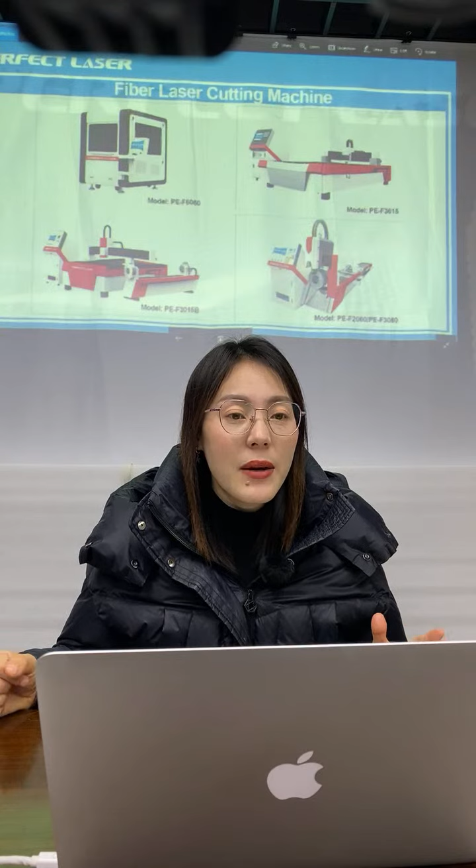Another model is PE-F3015. For this model, it has a bigger working area, 3,000 millimeters by 1,500 millimeters. If you want some other working area, you can also tell us, and we can offer you other models with different working areas. The PE-F3015 model is a very hot selling model in our company, and it's mainly used for cutting metal plate material.

So I would like to show some of the samples for you.

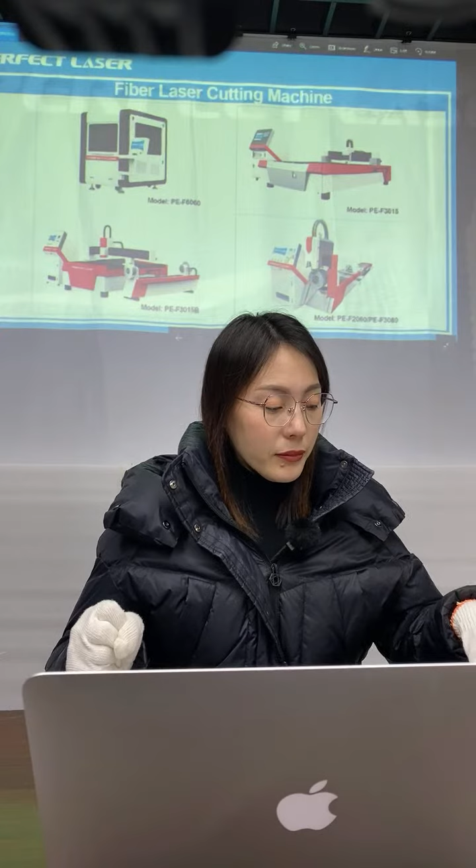You can see for those flat cutting samples. Hello Gabby, welcome. Hello Glenda, welcome to our live show.

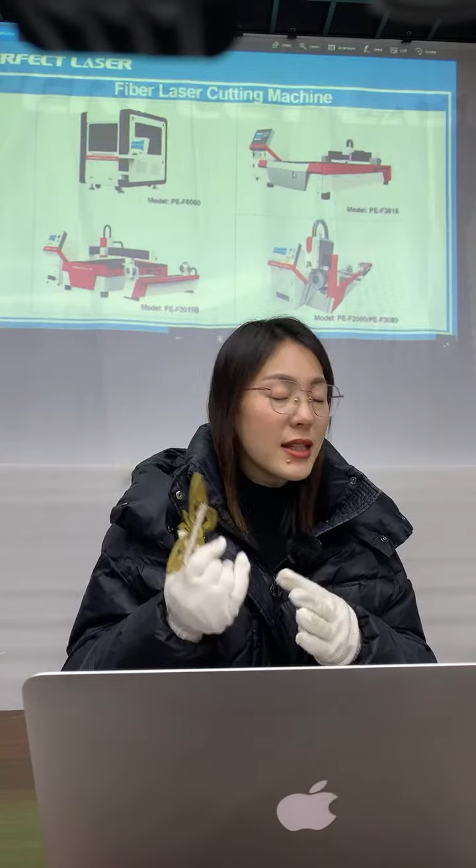Today we're introducing the fiber laser cutting machines. You can have a look, this is one of the samples. This is a copper material, the thickness is 3 millimeters. For the fiber laser cutting machine, it can work for all kinds of metal materials, such as copper, stainless steel, carbon steel, mild steel, galvanized sheet, and brass. All kinds of metal materials. This one is the copper material.

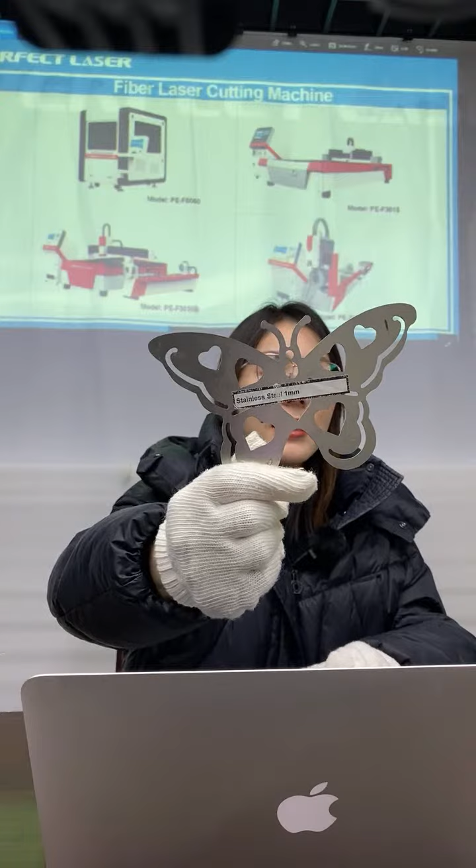You can also have a look, you can see all those cutting edges, and the cutting surface is very smooth. This is one of the samples, and I would like to show some other samples for you. This one is also a butterfly design, and you can see this is a stainless steel material, 1 millimeter thickness.

Hi Wu, welcome to our live show. You can see this, the thickness is 1 millimeter.

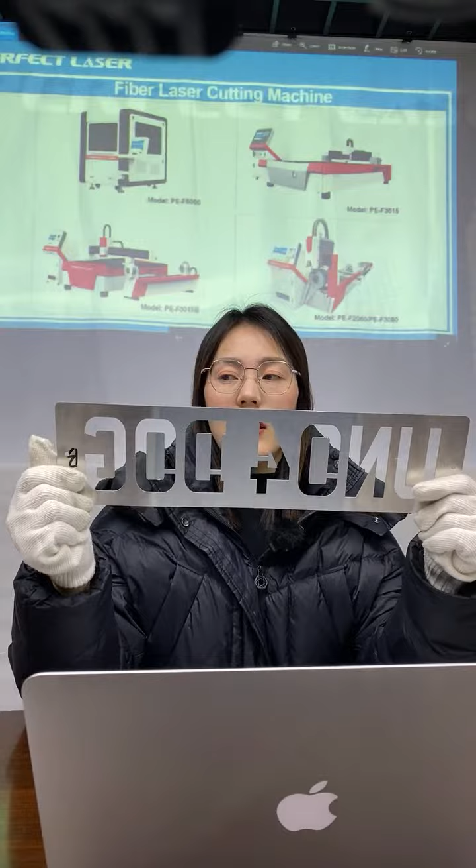Okay, so for some other materials, such as this one, this is aluminum material, so it's very soft. You can see the cutting, for the letters, numbers, and even logos. So this is aluminum material, and all the cutting surface is very neat and very comfortable.

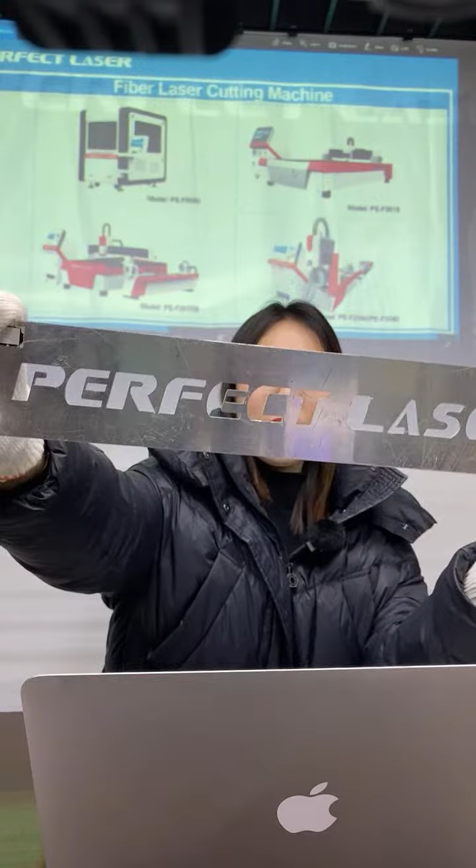And also this is another aluminum material, but this one is 2 millimeters thickness. You can see this one. This is the aluminum, 2 millimeters. And also for this one, you can have a look about the cutting surface.

And the small one, yeah. I know for this one, there's some metal spare parts, some accessories, even for some small parts cutting.

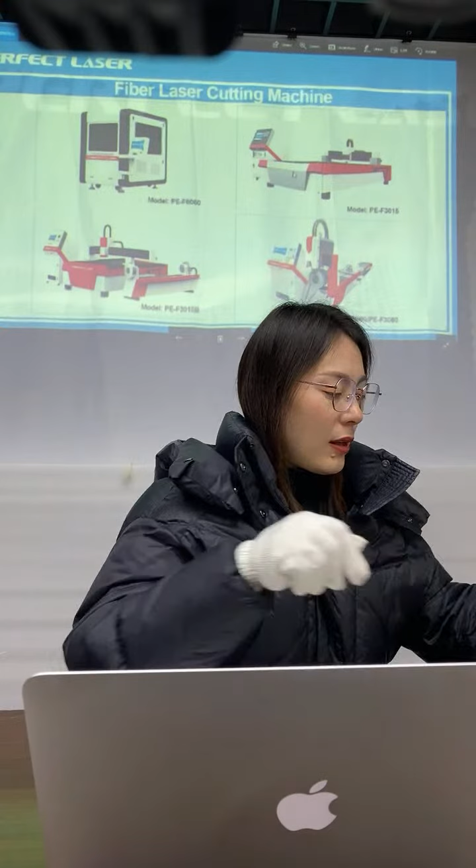This one is also a stainless steel material. You can see the design. Stainless steel.

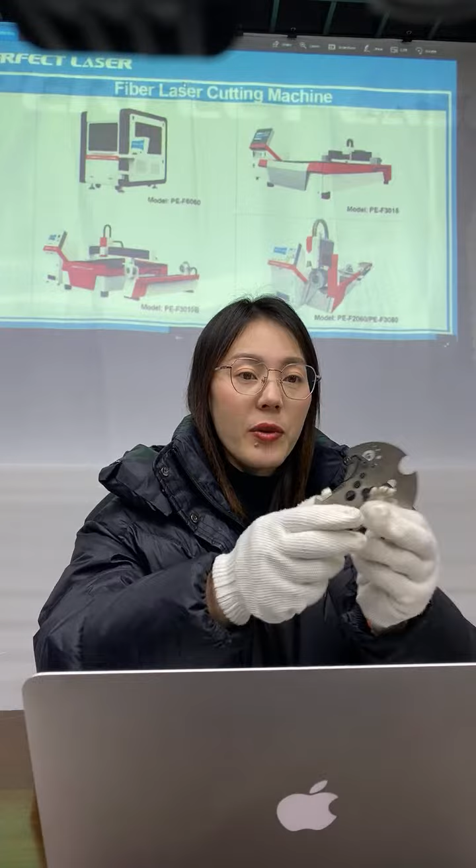And also this one, you can see, it's really a very precise cutting for very small parts. You can see there are many small curves, right? So many small curves there.

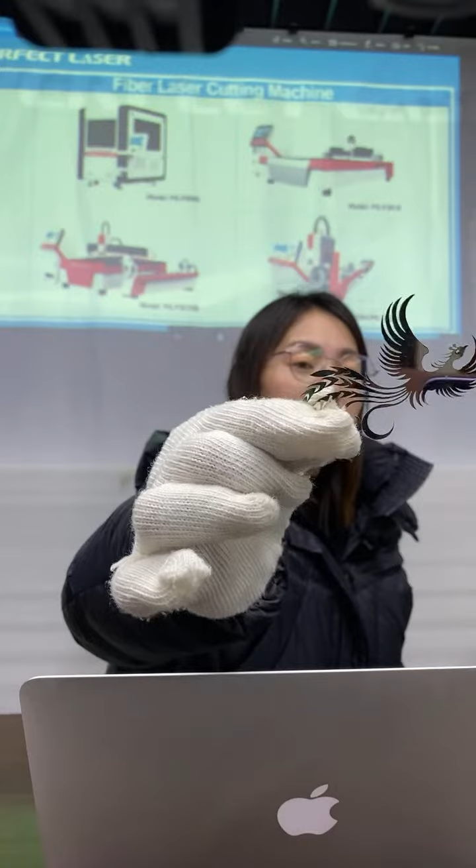And this one, well, this is really a very, very precise cutting. I like this one very, very much. You can see, especially for the mouth and eyes and all the feathers, it's really very precise, right? You can see even for those very small parts cutting, the fiber laser cutting machine will have a very good cutting effect.

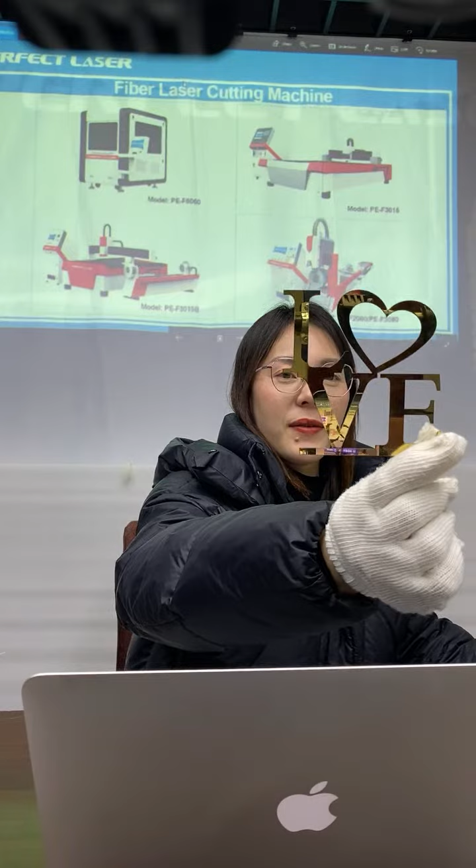Yeah, this one. This is also stainless steel. Well, love, this is a love. Very beautiful design, right?

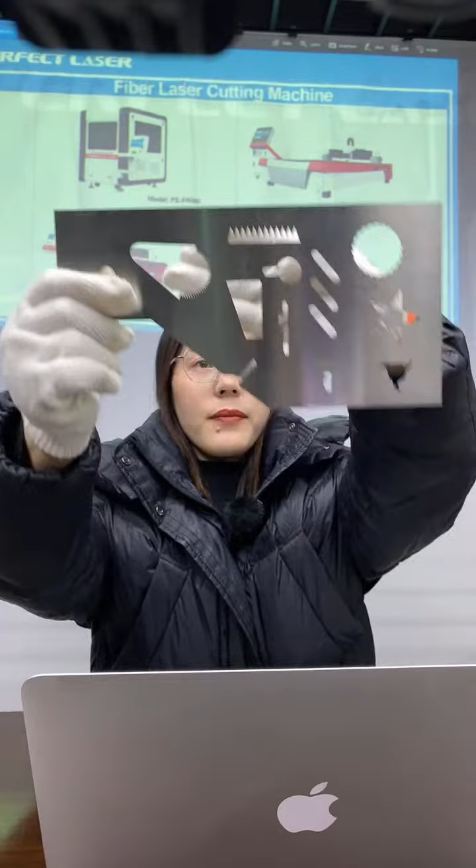And then for those one, yes, this is one time with different cutting design, cutting shapes. Yes, this one.

And also for this thick one. This is a big thumb up, just like a like button.

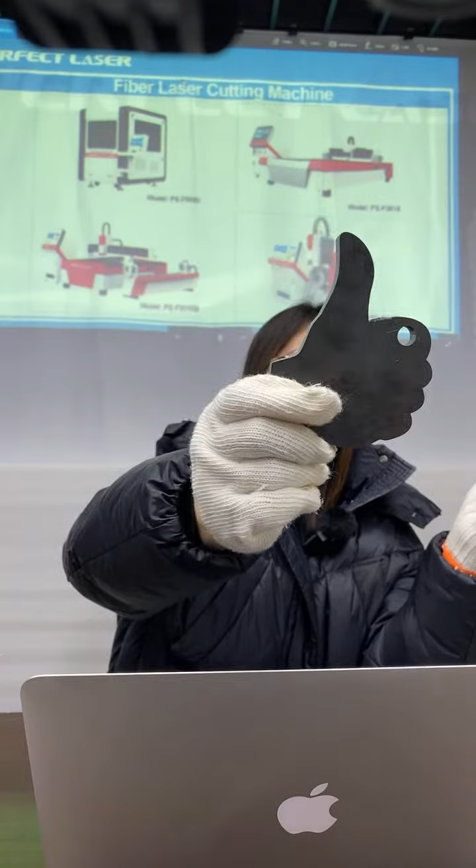Carbon steel, and also this one is also the carbon steel. You can see this carbon steel is 15 millimeters. You can see the cutting thickness, this is 15 millimeters thickness. This is carbon steel.

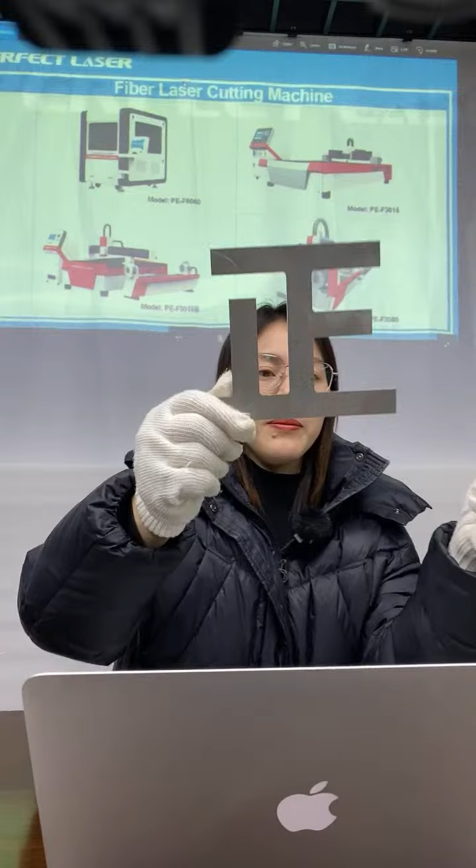And this one, aluminum, 3 millimeters. Wow, this is a Chinese word.

Also another one. Oh, this one is very heavy. So this is also carbon steel, 12 millimeters. This carbon steel is 12 millimeters thickness.

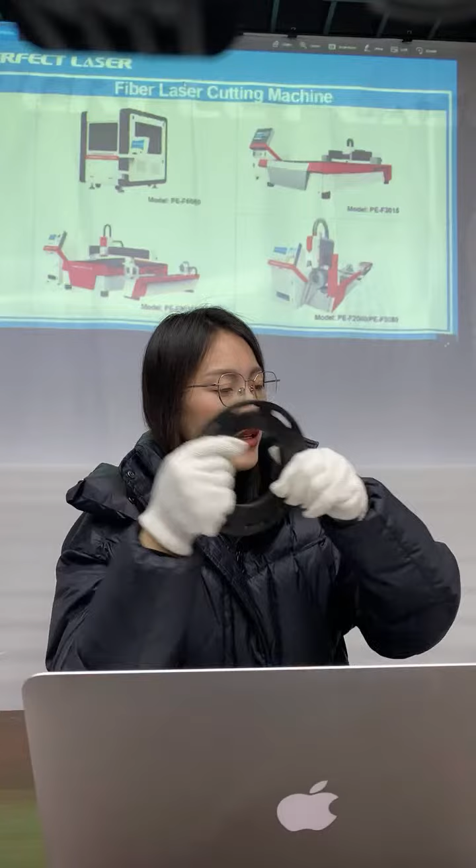Okay, so just now you see all these are the flat marking, or flat cutting. And also this kind of beautiful flowers.

We can make it after folding. We can make it like this one, just like a rose.

Okay, so this is for the flat cutting, especially for PE-F3015. This is the flat cutting.

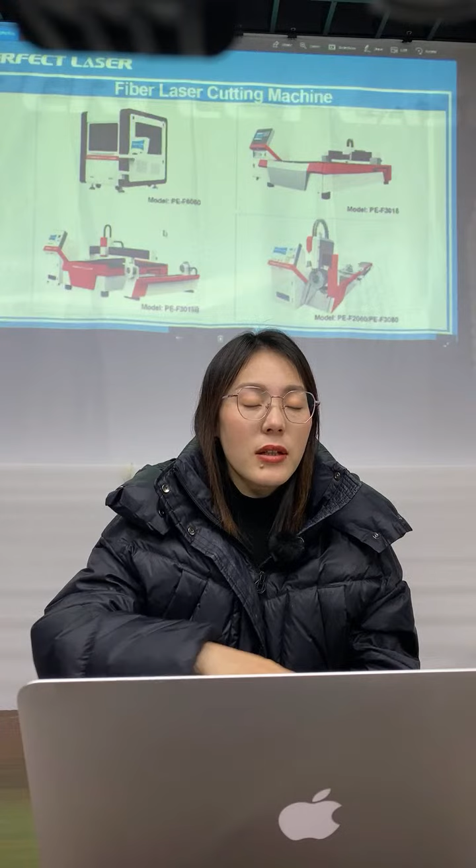Okay, so another model, PEF 3015B. So for this model, compared with the PEF 3015, it can not only realize the flat cutting, but also the round, rotary cutting.

Okay, so I would like to show you some round cylinder cuttings, just like this one. You can see this is a round, so this is a rotary tube, pipe, metal pipe.

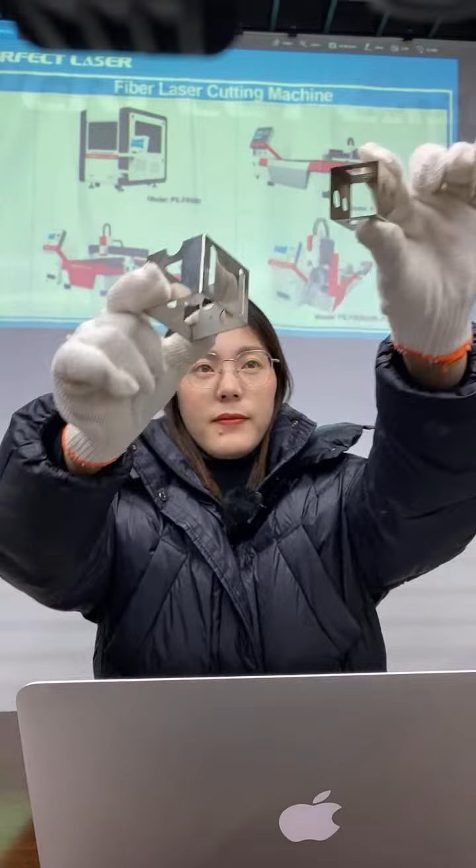And also for the square one, this is also the square pipe, with different diameters. Yeah, different diameters, and also the round. Wow, you can see this one, this is really a very big diameter cutting tube.

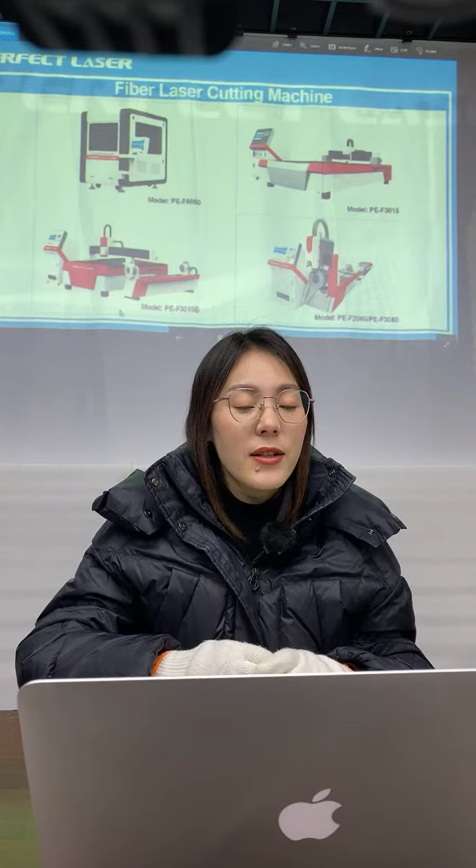Okay, so for PF 3015B, it can not only support the flat cutting, but also for those round rotary or the square tubes cutting.

Okay, so for the last model, PEF 2060 or PF 3080. So 2060 and 3080, they have different working areas.

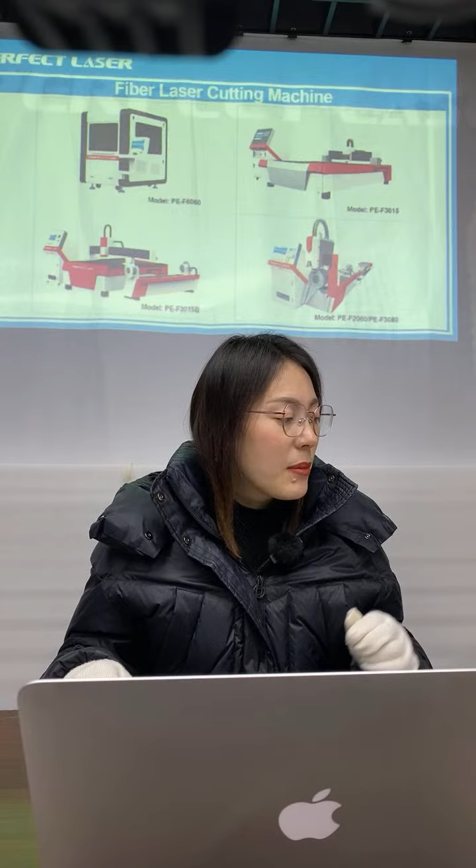Okay, so for the PEF 2060 or 3080 model, it's mainly only used for cutting those tubes or pipes, those rotary or the square pipes, and also those square pipe or tubes.

For those four models: the PEF 6060 has a smaller working area and is only for flat metal cutting. The PE 3015 has a relatively bigger working area, and it's also used for cutting flat plate.

The PEF 3015B can not only support flat cutting but also round or square tubes and pipes cutting. Another model, the PEF 2060, is mainly used for round or rotary cutting.

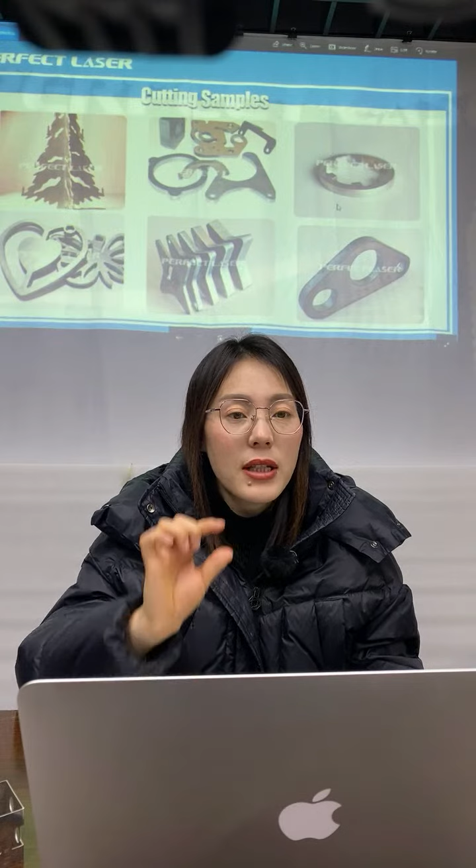So this is the general introduction about those four models. You can also have a look at this photo, where you can see many different cutting samples with different thickness, different materials, and different designs and shapes.

Since the fiber laser cutting machine can cut all kinds of metal materials, it's widely used in different fields and industries, such as hardware, lamps, cars, mechanics, kitchen utensils, and bodybuilding equipment. Many industries related to metals can use the fiber laser cutting machine.

Okay, right now let's start discussing this model. This is the PEF 6060 model.

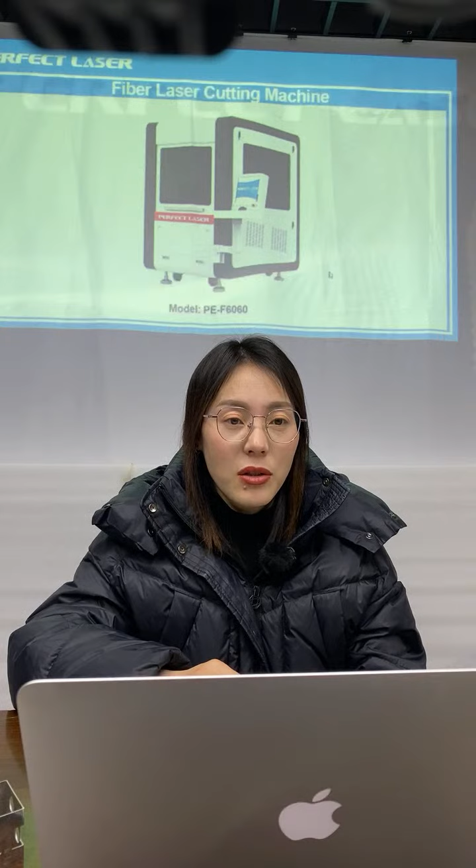This is the main structure. You can see inside of the machine it has the cutting head, and this is a separate PC system. Also inside the machine it has the working platform, with a double rack driver on two sides of the working platform.

Now everybody please enjoy the working video of this model, so you can have a look at how this machine works.

This is the PC control system. We will install the software into this PC, and then we can operate with the mouse and keyboard. Everything is ready, we can use it very conveniently, and it's very easy to operate, control, and adjust the parameters based on this software.

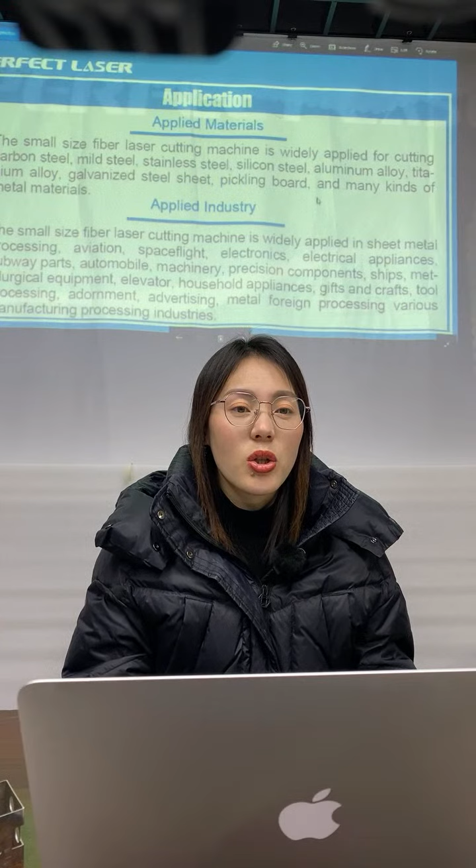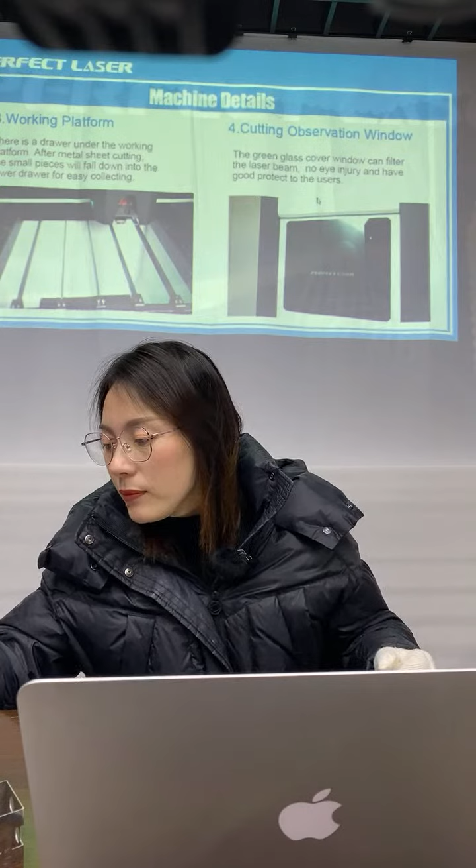millimeters. Okay, so number 4, this is the cutting observation window. Since this model is fully enclosed with a cover, we can see through the observation window to detect the working process of the machine. So with this observation window, there is no injury to the eyes, and it will be very environmentally friendly.

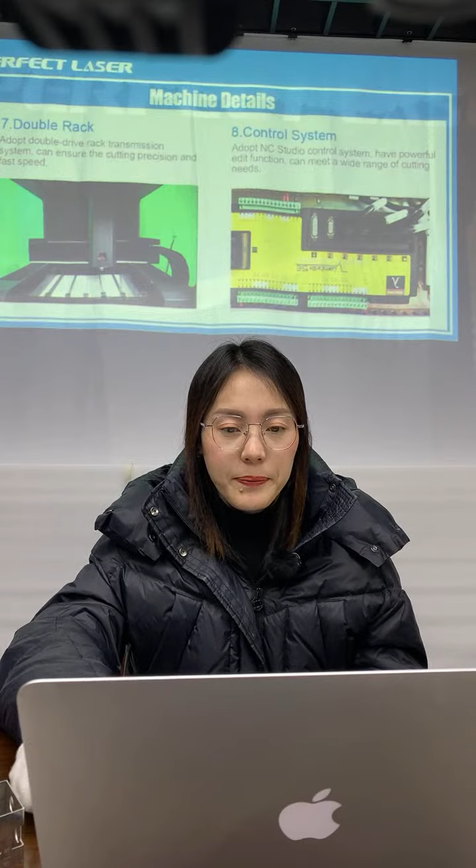Number 9, this is a collector, just like a drawer, so we can pull it out and pull it in. This collector will collect the wasted pieces after cutting, metal pieces after cutting will be collected into this collector, and then we can take it out easily.

Number 10, this is the water chiller, a water cooling machine. It's used for cooling and releasing heat during the machine's working process, so that it keeps the machine working in a very stable condition and status, and it also detects the working temperature automatically.

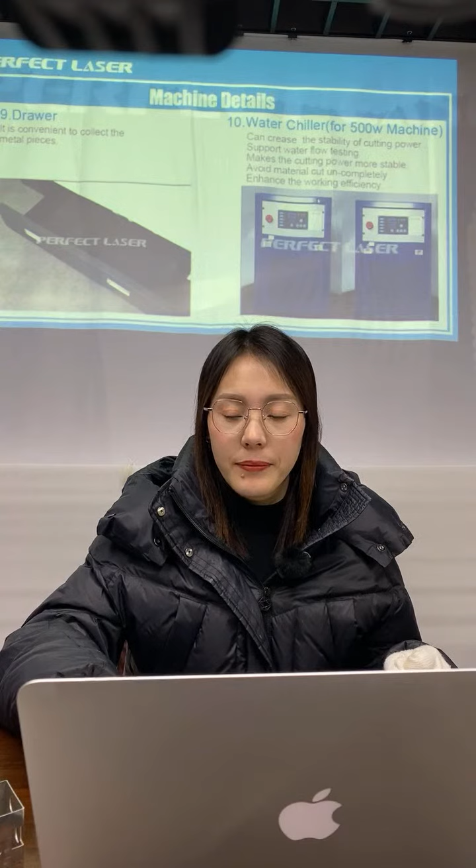Yeah, this is the water chiller. So, this is the introduction about the first model. The first model is an environmentally friendly model, right? It's enclosed, a fully enclosed machine.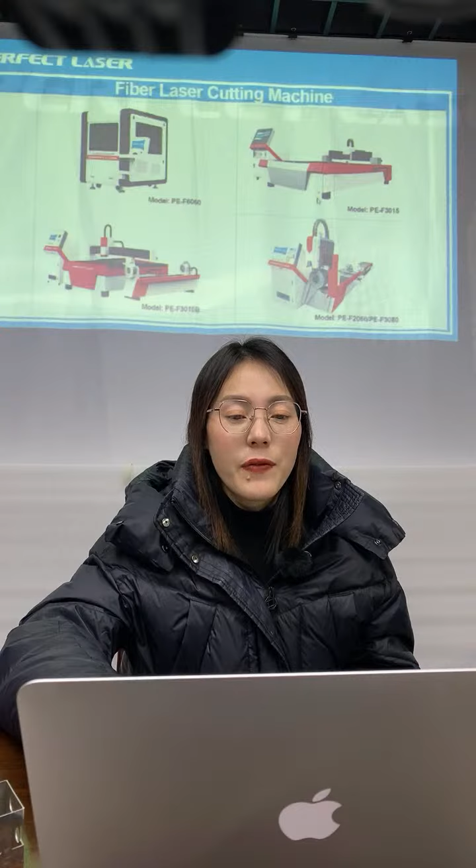Next, I would like to introduce the second model in detail for you. The second model is PE-F3015. This model is a very hot selling model in our company, and it's mainly for flat plate cutting. From the outlook and structure, we can see it's mainly composed of 2 parts: one is the control cabinet, the control system, and the other is the machine body with the working platform and the cutting head. You can see the main structure: the control cabinet, the laser optical bridge, the material feeding wheel, and the laser cutting head.

Now please enjoy this working video, please. You can see the structure and also the working of this machine.

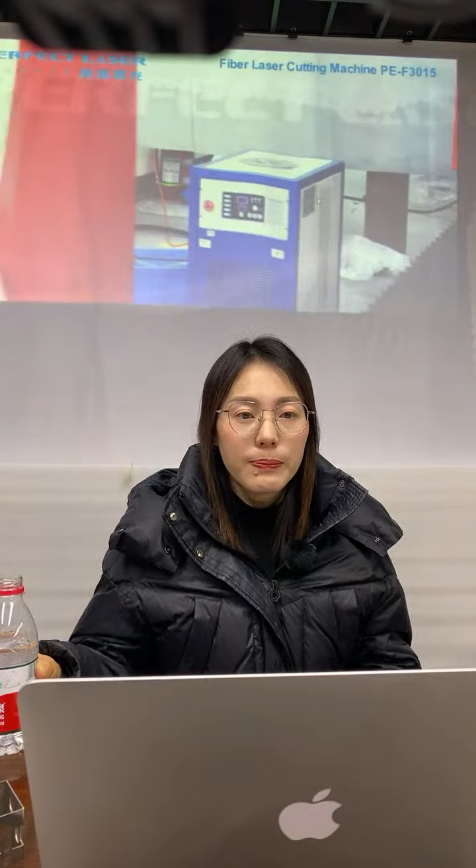Hello, Gabriel. Welcome.

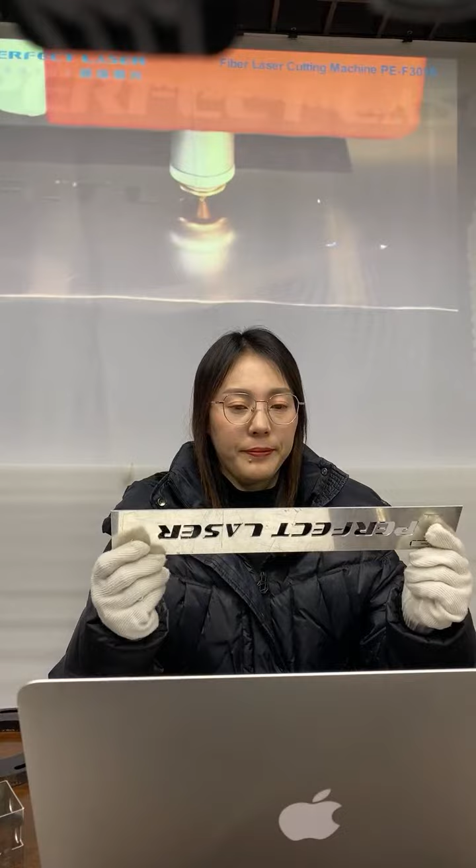Okay, it's this one. Exactly, this one in my hand. Yeah, so we can see the cutting process. Well, it's gonna finish, exactly the same with the one in my hand, right?

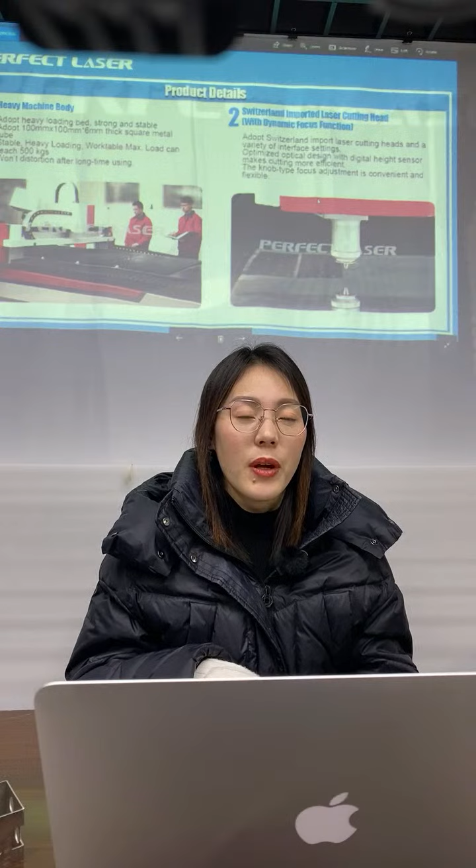Now we can have a look at the details of this model. Number one, you can see this is the working platform. So this one, the working area will be 3,000 millimeters by 1,500 millimeters. For this model, this is the working area.

And for this machine, the machine bed has a very heavy loading, and it's very strong and stable, since we adopt the 100 millimeters by 100 millimeters by 6 millimeters thick square metal tube, and also by once molding. So it will be very stable, strong, and heavy, with a very big loading capacity, and it will not get distorted even with long time use.

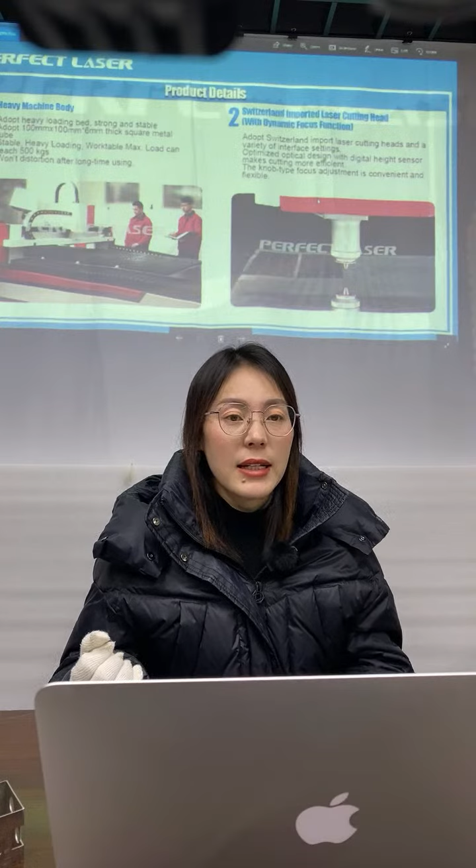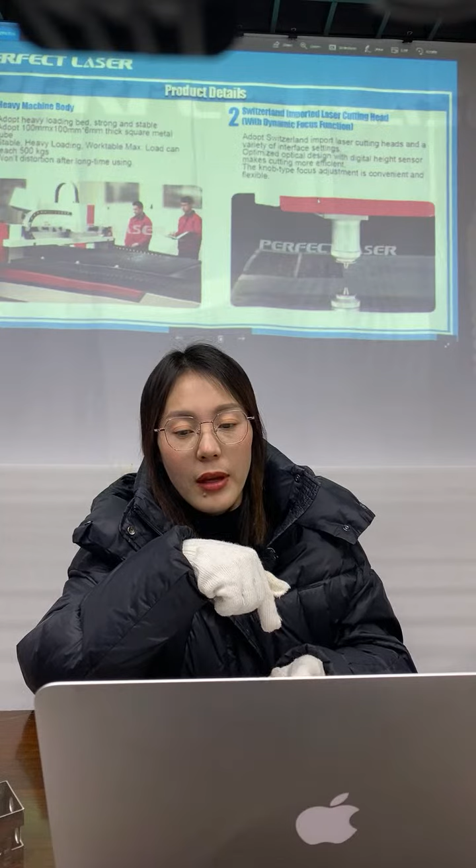Number two, this is the cutting head. It has a dynamic and automatic focusing and tracking function. So even when the whole plate is not that flat, for uneven plates, the cutting head will automatically adjust the distance. It will automatically track the surface of the cutting object, and also automatically adjust the distance between the cutting head and the cutting surface. So this is the automatic and dynamic focusing and tracking function of this laser cutting head.

Number three, this is the laser source. All of our fiber laser cutting machines use well-known brand laser sources such as Raycus and IPG Max, to make sure the machine works with very good quality, with a very fast cutting speed and high accuracy of cutting, and also to make sure the machine works for a long time with a long lifespan.

So number four, this is also the sawtooth type working table. It's very stable and has a very heavy holding ability.

Okay, so number five, this is the servo motor -- Japan imported Panasonic servo motor. So it will increase the cutting speed and the stability, and make sure the high accuracy of the cutting.

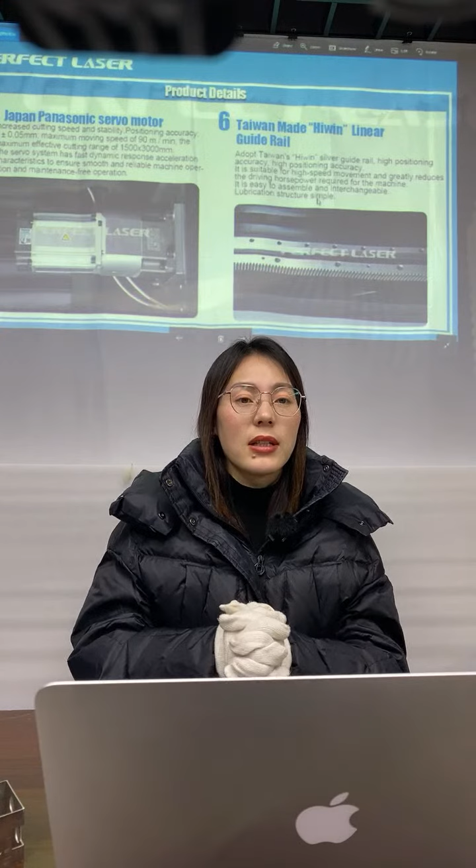So number six is the linear guide rail. This is a Taiwan-made Hiwin linear guide rail, so it will make sure the cutting head moves on the linear guide rail smoothly, and make sure the cutting result will be very accurate with high precision.

So number seven, this is a material feeding ball design. Since it's round, a ball, when the material comes through the wheel, this roller will make it much easier to fit the material onto the machine, to the working table. And it will not scratch the plate or the material. This is a very reasonable design.

Number 8, this is a separate controlling cabinet, with the industrial PC system in it, and also the mouse, keyboard, everything is ready there. So we will install the cutting software into the machine, and then we can operate on this control cabinet directly.

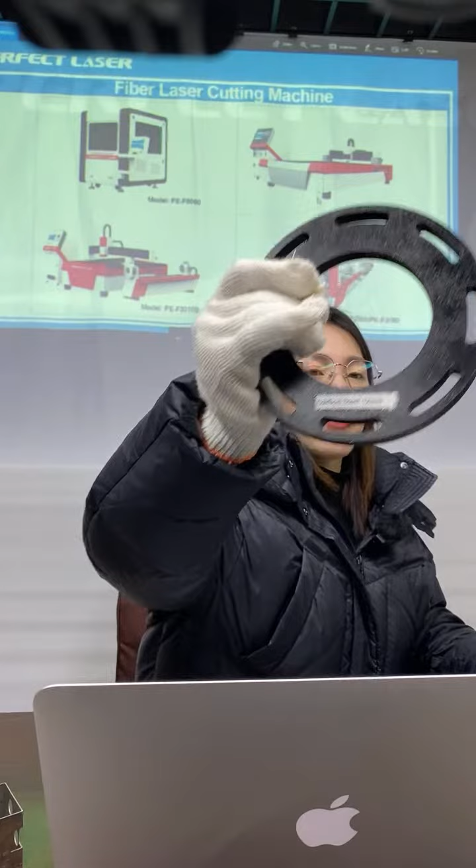So till now I've already introduced the PEF 6060 model and another model, PEF 3015 model for you. You can see these two models are mainly for flat plate cutting, such as flats with different thickness. This one is the carbon steel, and also this is very thick, 12 millimeters carbon steel thickness cutting.

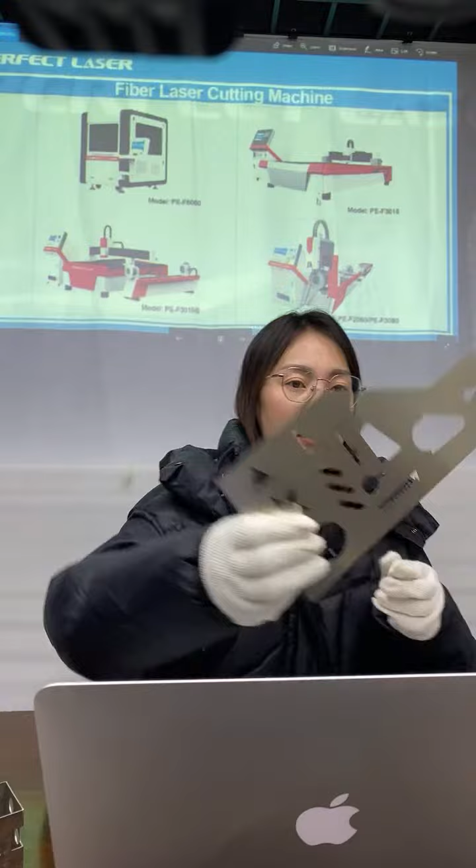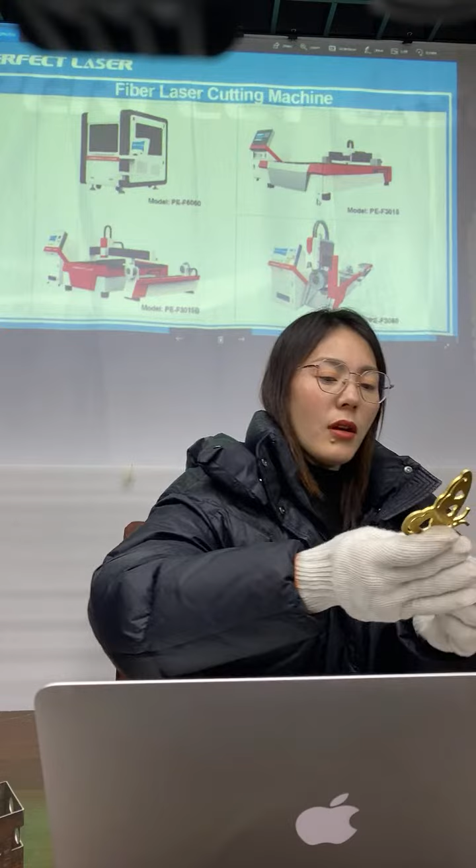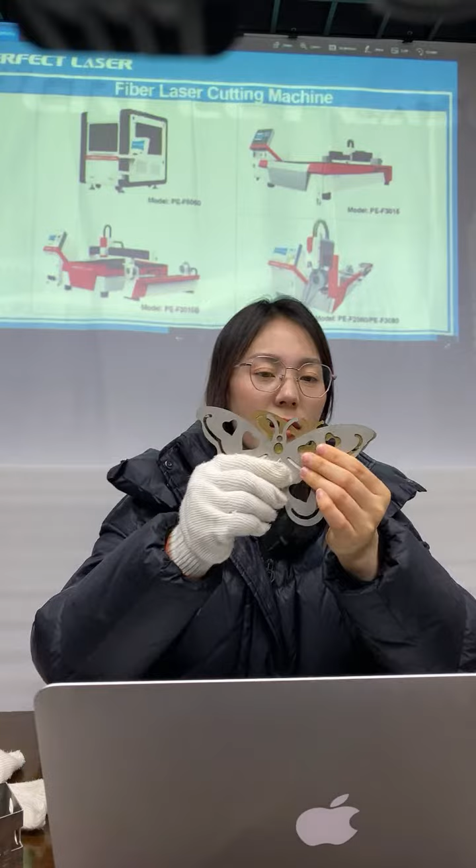And the stainless steel 1 millimeter, copper 3 millimeters. So you can have a comparison. These two, both of them are butterfly design, so we can compare the thickness - you can see the thickness is different.

Thickness is different.

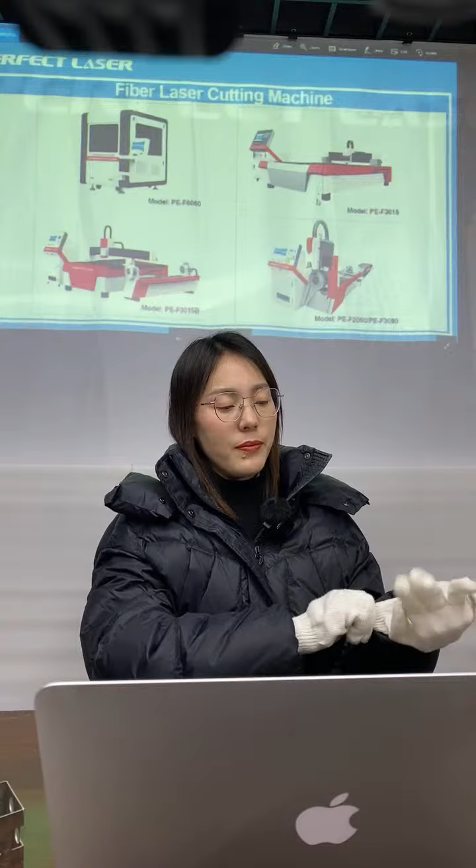So another one, a very small part design, small part cutting. Well, this one - I like the eyes very much, and also the feathers, because it's very small. Very small, but the fiber laser cutting machine can still have very high precise cutting for it. Also this one, we can look at the very small curves there.

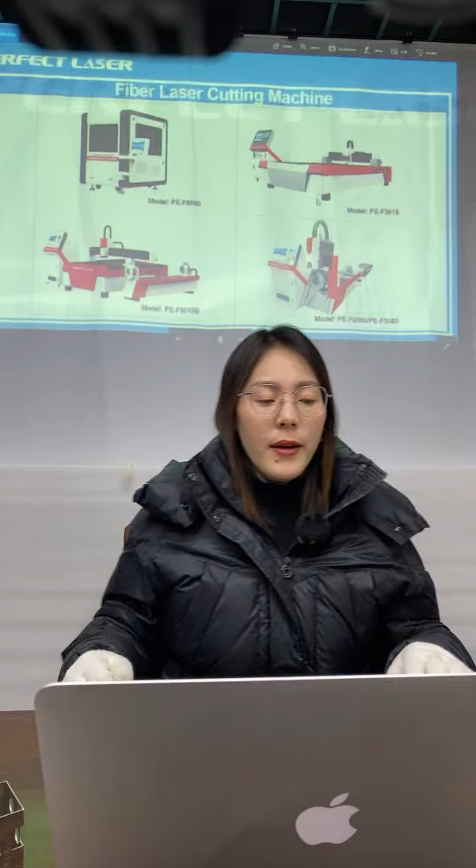Okay, so all of those are the flat cutting, flat plate cutting, for all kinds of metal materials.

So now next I will introduce another model, PEF 3015B. This model can not only cut flat plate, but also round, square tubes or pipes cutting, with this rotary fixture.

So we can see this is the outlook and structure of this machine. You can have a look at the main structure, the control system, the cutting head, DSP controller with the PEF 3015, and another one, the rotary cutting system. I would like to show you the working video, please enjoy it.

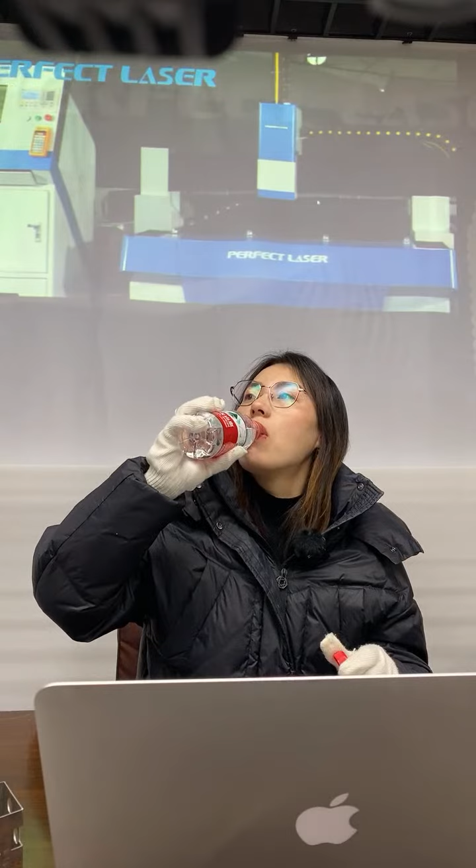This is the rotary fixture there.

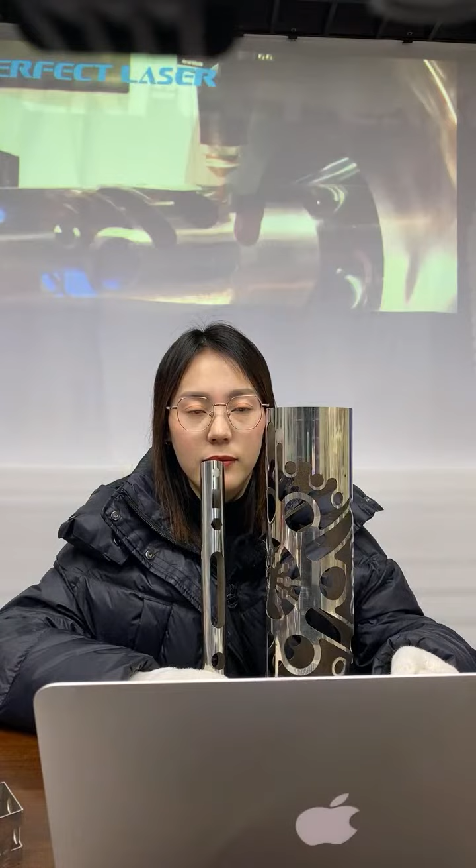Yeah, exactly the same with the one in my hand, right? The same one, and also the tubes, the small tubes.

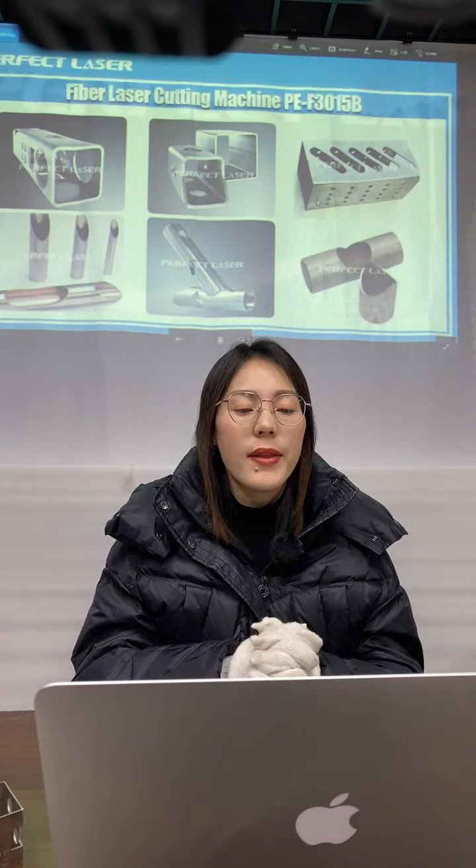So you can see from the video, not only for the flat cutting but also for round or square tubes cutting. This is the working video of this model, you can see the different cutting samples here - different shapes, the square one, square pipe, rotary pipe, with different designs.

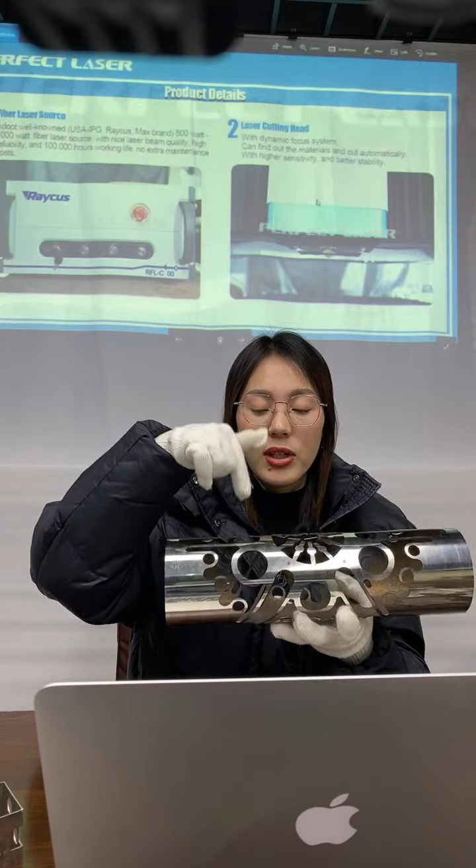And another one is the laser cutting head. The laser cutting head, especially for those round cutting, because it's not a flat surface, so with the dynamic focusing function, the laser cutting head will automatically track the surface of each part and automatically adjust the distance between the surface and the cutting head. This is the dynamic focusing system of this machine.

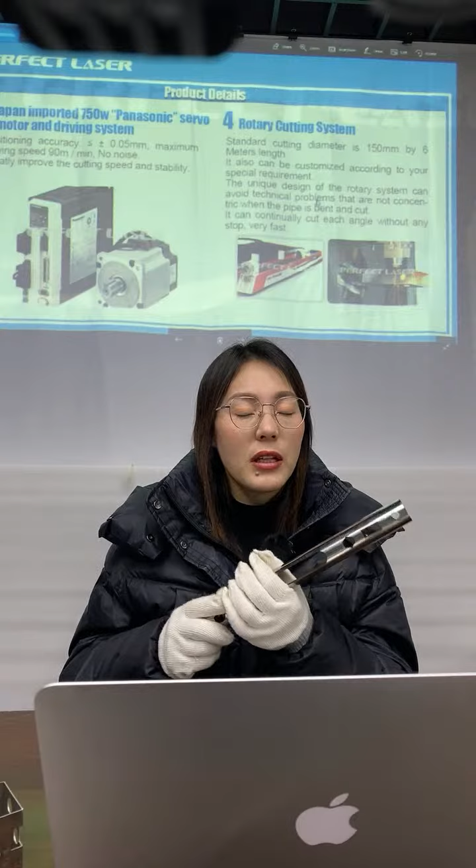Panasonic servo motor, so it has very high positioning accuracy and also very high cutting speed. Another part is the rotary fixture, the rotary cutting system. So for round or square pipes, it will fix the pipe tightly and then feed the material to the cutting head for cutting.

This is the LCD controller. So for this machine, it also has two ways to control the machine. One is through the control cabinet, which can operate with a mouse, a keyboard, and the LCD screen. We install the software into the machine so we can operate it easily.

For this model, we also have the DSP remote controller, so we can use this remote controller and stand beside the machine, in front or back side, to detect the working area exactly, and then set up through this remote controller. So it's very easy and convenient for the engineer to operate in any direction.

The same auto feeding ball design system. Since it's round, it's like a roller, like a ball, so it will be very easy for feeding the materials to the working table, and it will not scratch the material or the plate.

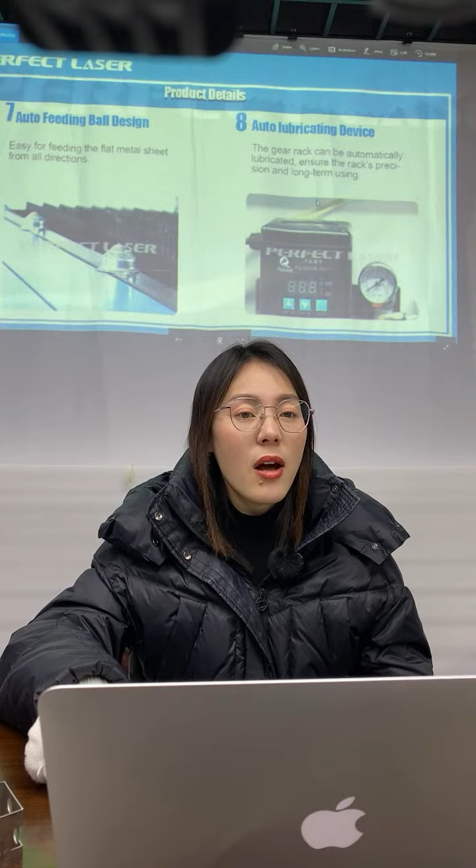Number 8, auto lubricating device. The gear rack can be automatically lubricated, ensuring the rack's precision and long-term use.

Number 9, this is the water chiller, also the water cooling machine. It will cool the machine during the working process and release the heat, and we can see the temperature through this display. It makes sure the machine works in a comfortable, certain temperature to keep it in the right state, and also ensures very high, accurate, efficient cutting.

So why choose a fiber laser cutting machine? Let me introduce the advantages of this machine. Number 1 is the high quality. The fiber laser has a smaller focus diameter and high work efficiency, high accuracy, high cutting speed, and also very good cutting quality.

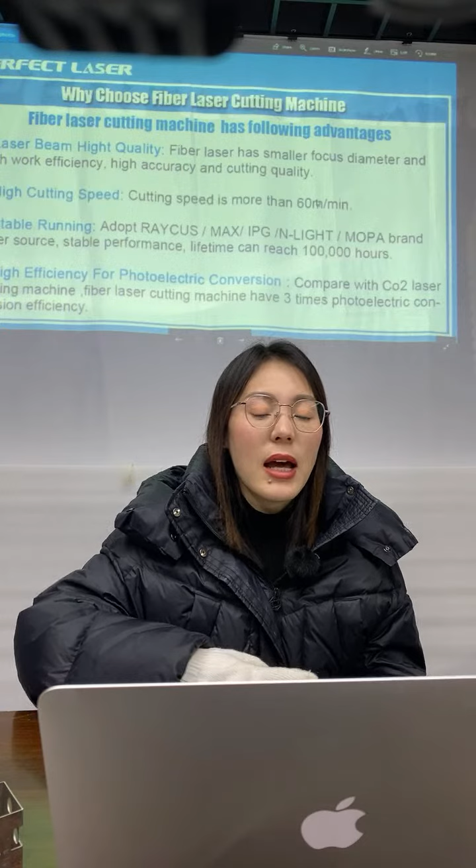Number 3, stable running. We adopt Raycus, IPG, Max, or other well-known brand laser sources to ensure stable performance, and the lifetime can reach 100,000 hours.

The next one is low cost. It's a very energy-saving machine and also environmentally friendly.

Number 6, free of maintenance. With fiber optical transmission, there's no need for reflect lenses or optical adjustment, so it saves maintenance cost a lot. Number 7, easy operation. With fiber cable transmission, there's no adjustment of optical path needed, so it's very easy to operate.

Super flexible optical effects. It has a very compact design, complying with flexible production requirements. So this is the third machine.

My dear friend, I have already introduced 3 models for you. So which one are you interested in, or are you in need of those fiber laser cutting machines? If you are interested in this kind of cutting machine, and also if you have any questions, you can let me know anytime and discuss with me.

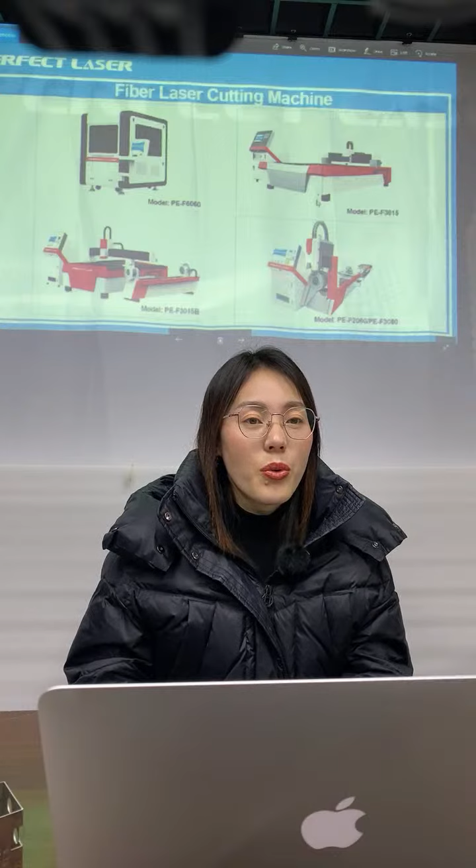Right now I have already finished those three models: PEF 6060, PEF 3015, and PEF 3015B. So at last is the PEF 2060 or PEF 3080. For 2060, the working area will be 2000 by 600 millimeters, while at 3080 it will be 3000 by 800 millimeters.

Now this is the outlook of this machine. You can have a look. Also the control cabinet, and another part is the machine body.

So this machine is mainly used for rotary, for round or square pipe types. For this one, you can see this one, a relatively smaller diameter square pipe.

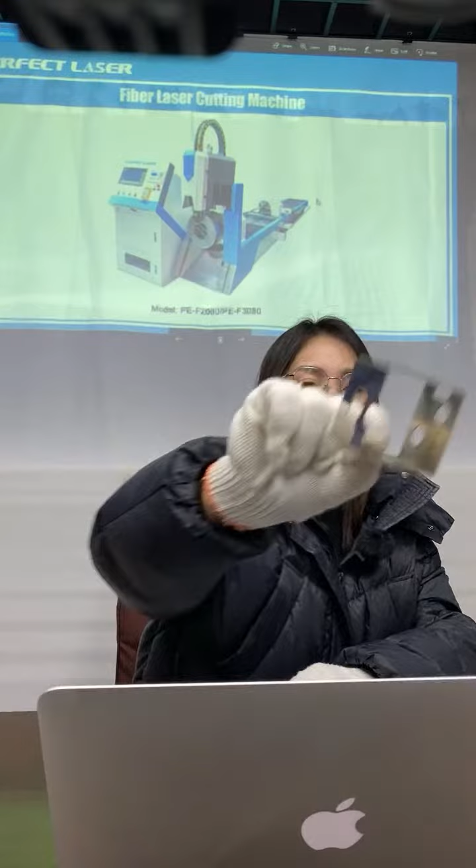I also have another one, this is a big diameter. You can have a look at this big diameter. Yeah, this is small, it's big.

Small and big diameters. And also for the round pipe, you can see this is a relatively smaller pipe, round pipe. Yeah, and I also have a very big one. Oh, that's not very big.

So very big diameters too.

Hi, hello. Hamaro. It's really very hard to read.

So this is the main machine, main structure. You can have a look. First one is the operation panel, the control cabinet, and the machine body with the rotary fixture, the head, laser cutting head, and the rotary fixture.

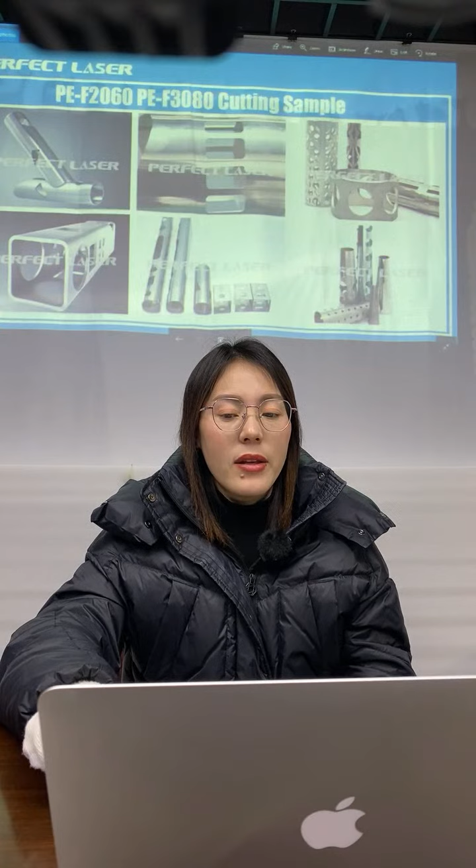There are some cutting samples by this machine. You can see all the square pipe with different diameters. Also round pipe, and also different thickness.

So my dear friend, let me show you the working video of this machine. Please enjoy it.

Then this round tube, yeah, this one in my hand.

Yeah, this is the remote controller. As you can start, pause, or adjust the cutting area. Round, square.

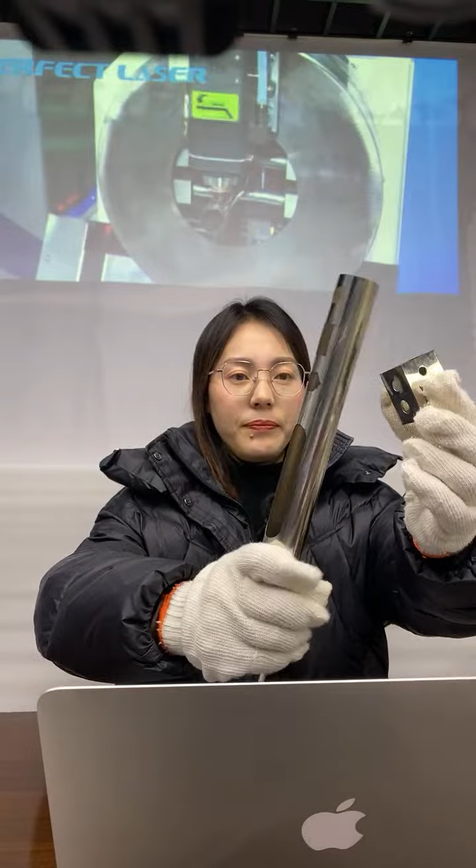Okay, please enjoy the video once again. Hello, Santiago.

Yeah, you can see with the rotary fixture there, it can turn around, and then it will realize the cutting. Okay, this is the cutting samples there.

So now let's take a look at the details of this machine. The very heavy loading machine body is very strong and stable. It has a very big loading capacity, and also it will not get distorted even for long-term using.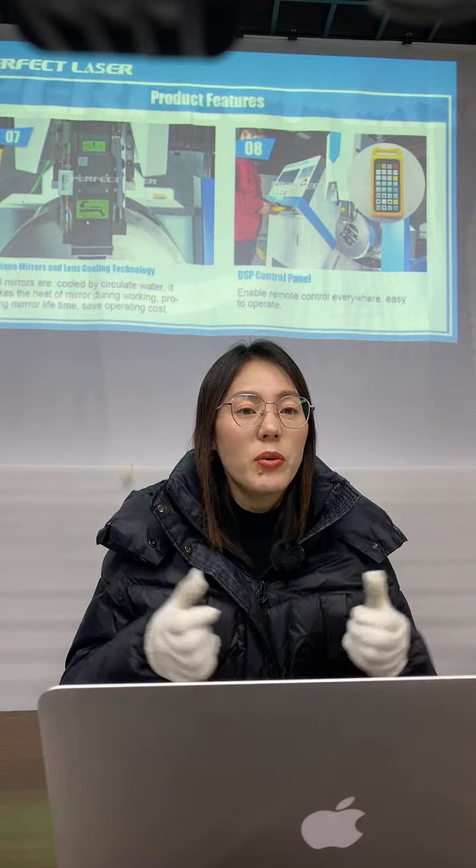And then we also, with the DSP remote controller, can realize remote control for the machine and adjust the cutting, making it easy and convenient to operate the machine.

Since the model PEF 3015, 3015B, and also this model PEF 2060, both have the functions to cut all those round or square pipes. Now let's have a look at the diameters available. We have different chuck diameters to support different diameters cutting.

For example, the chuck diameter 160 millimeters can support square pipe cutting for 130 to 140 millimeters, while for round pipe it will support 160 millimeters. For 220 millimeters chuck diameter, it can support 200 millimeters square pipe and 220 millimeters round pipe. For another big diameter, 350 millimeters chuck diameter.

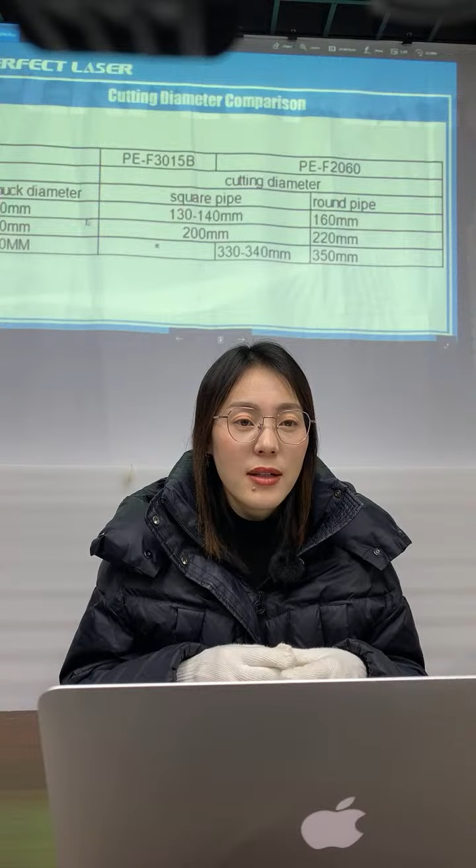This feature is not available for PEF 3015B, only for PEF 2060. For the 2060 model, the cutting diameter support for square pipe will be 330 to 340 millimeters, while for round pipe it can support up to 350 millimeters.

For round pipe cutting, the cutting material can be exactly the same as the chuck diameter. For square pipe or tube cutting, it should be smaller than the chuck diameter.

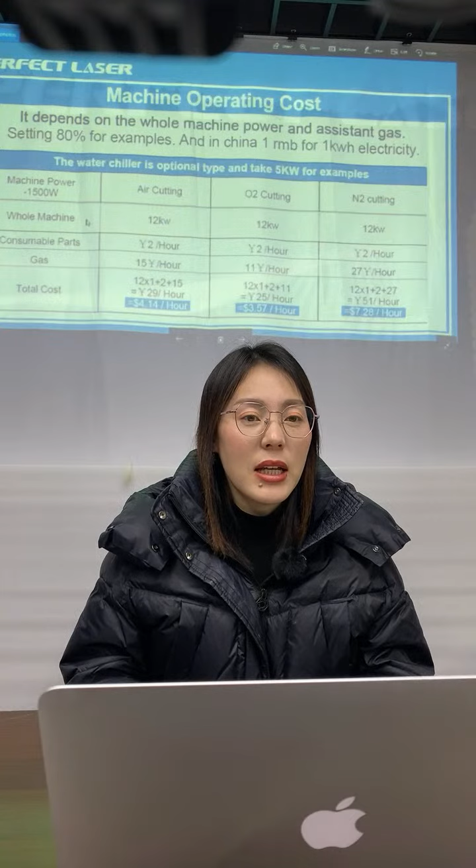Comparing these three, we can find that cutting by oxygen will be economical. Nitrogen cutting will cost a little more.

We can see that the nitrogen cutting sample is much more shiny and sparkling compared with the oxygen cutting. The oxygen cutting surface is a little dull. So if you want to make some cutting samples or tests, you can use oxygen cutting, but if you want that sparkly and shiny cutting effect, we suggest using nitrogen cutting as the auxiliary gas.

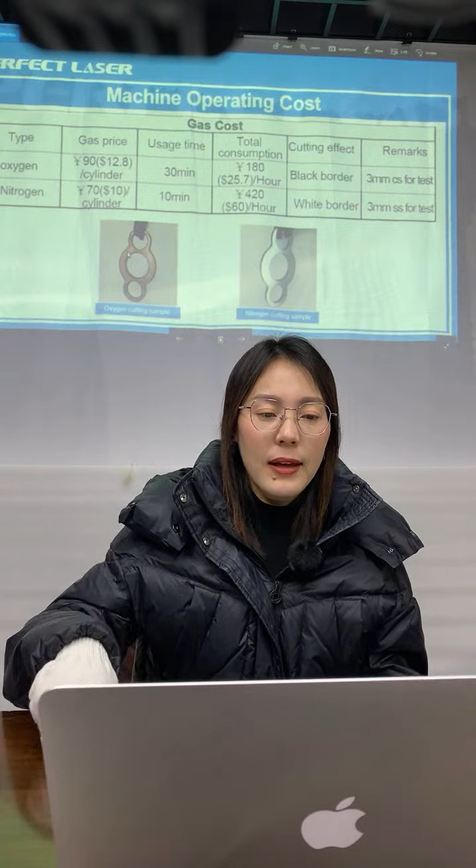Now about the after sales service. Normally we offer a 12 month warranty time.

Today we are introducing our fiber laser cutting machines for all kinds of metal materials, such as this kind.

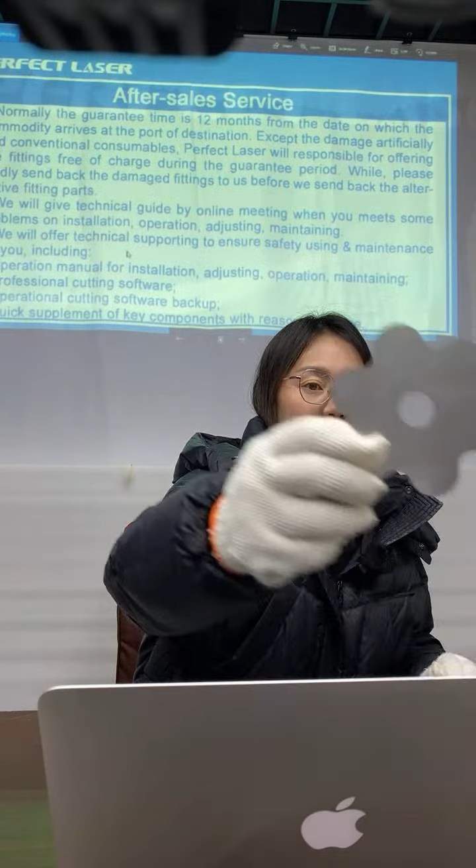This is one of the cuttings, and also very small curves, precise cutting like these, and also other designs. The stainless steel is 0.5 millimeters.

And also this is a star. Beautiful. For the big one, this is carbon steel at 15 millimeters.

Well, others, aluminum cutting, perfect laser.

During the warranty period, we will offer you a full range of solutions for any of your questions, such as installation, adjusting and operation, installation, maintenance, anything you are in doubt about. We will also offer you the cutting software as you need.

All of our machines have a very strict quality control system. All of our machines will have a 48 hour running test and 72 hour aging test, to make sure that our customers receive the machine with very good quality and very good status and conditions.

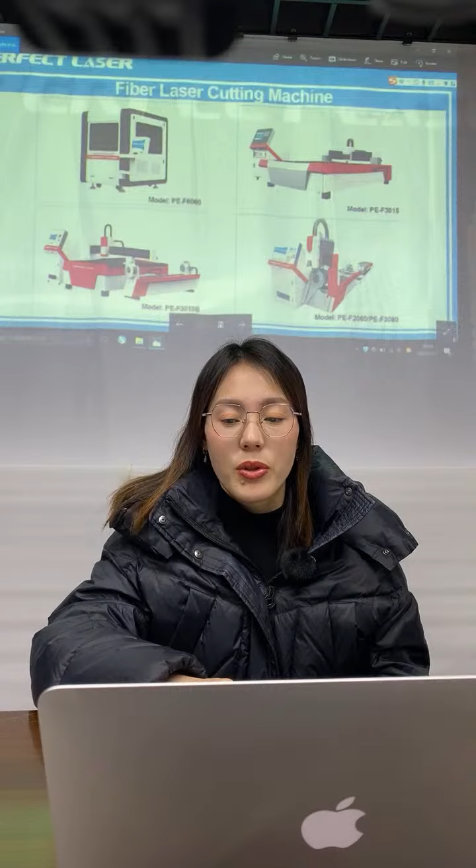So my dear friend, today I have introduced mainly these 4 models for you. First model PF6060, this is a fully enclosed machine. The working area will be 600 by 600 millimeters.

Now, at last, let me show you the working video of this machine one by one. This is the first model PF6060.

For this model, you can see it has a separate control cabinet. We operate by this control system. We can set the working hours by the software, and then the machine works based on the software and starts cutting, and then we can see the working process through the observation windows.

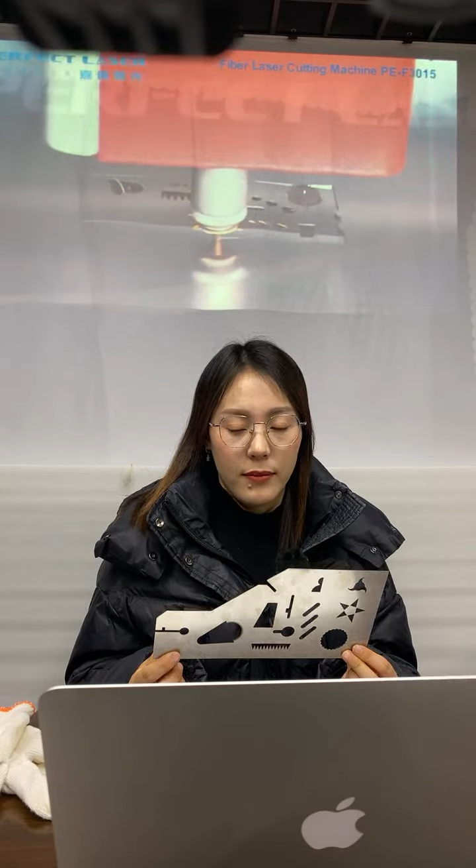With a small difference, also a small difference. Very similar, but a little different, right? Not exactly the same, but very similar with this one in my hand.

I like this curves cutting, I think this is really amazing. How does it realize those very small parts cutting? Just like a needle. Oh, it's very small.

Yeah, this is a fish, but it can be used to open a bottle - open the bottle cover, like a beer cover.

So at last it will have a perfect laser cutting. Right now this one in my hand is aluminum material, 2 millimeters thick.

Wow, the last letter R. Okay, finished.

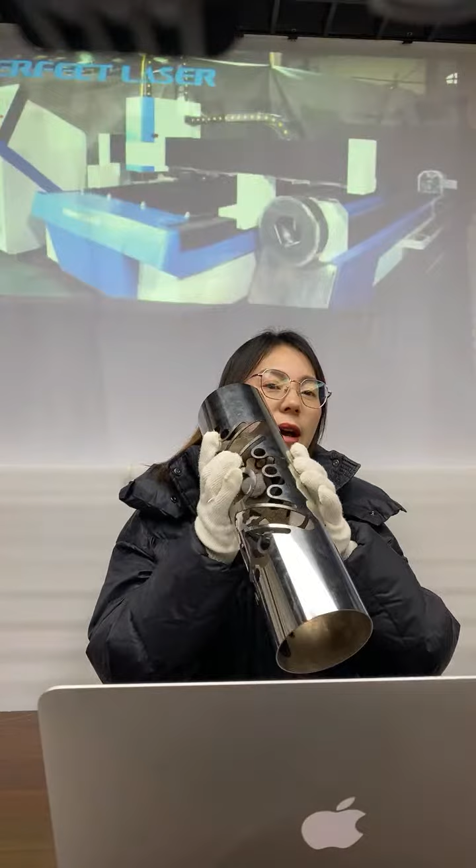Very big pipe, very big tubes cutting. This machine can not only work for flat plate cutting, but also on those tubes - square or round tubes cutting. It's really very multifunctional.

So this model is for both round or pipes and flat cutting. Well, the last model is only for pipes cutting. Okay, pipes cutting, this one.

With this rotary fixture there, you can see. This is the DSP controller. This is the working process of this model.

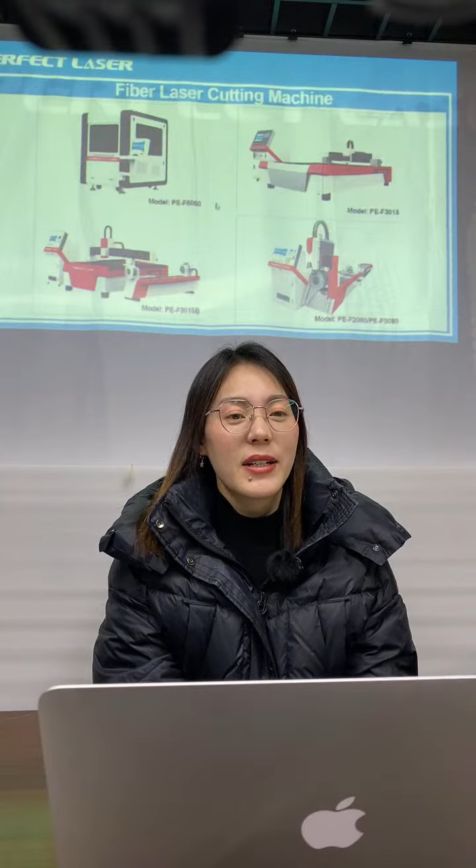So my dear friend, which model is your interested model? Which one do you like? Which one are you in need? You can see all of those models, you can cut for different thickness, different materials, and even for all kinds of metal materials. Very good for all kinds of designs. Are you interested in this kind of machine?

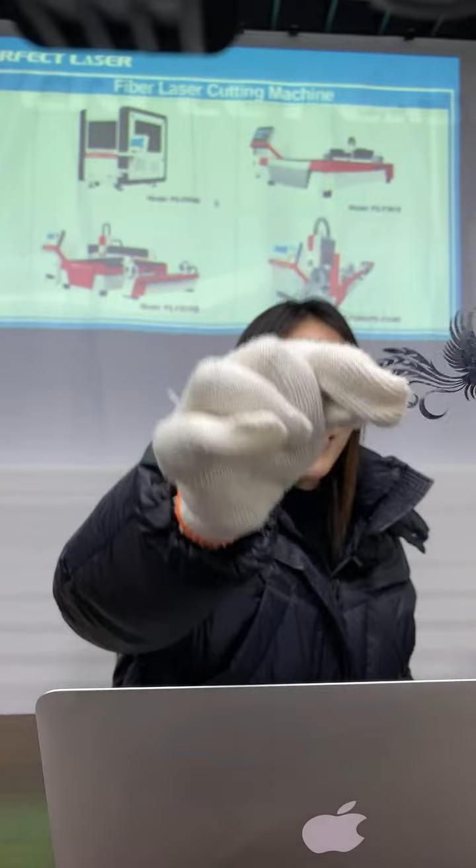Well, you can see even for those very precise cutting, I like these eyes very much, and also the feathers. Very sharp, very small, mini part. Even for those very small parts, the fiber laser cutting machine can have a very good cutting effect. That is really a very good machine.

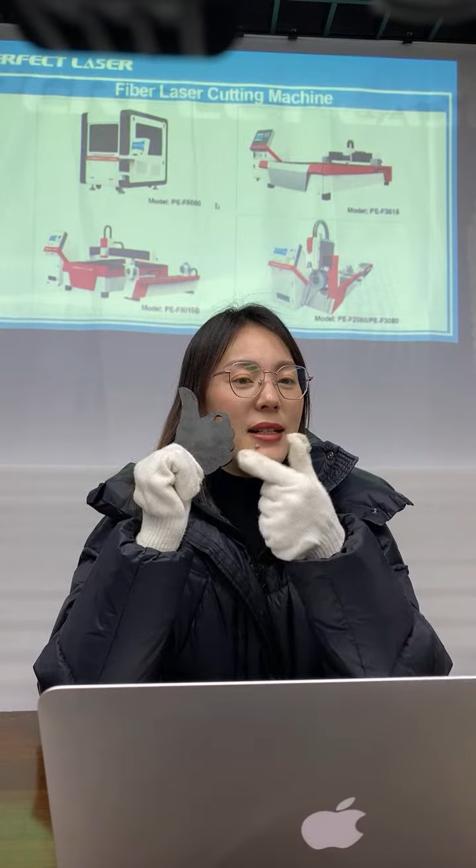Also you can see this one is also done by the fiber laser cutting machine. Okay, so right now this is all the introductions about these 4 models. If you have any questions, please remember to tell me.

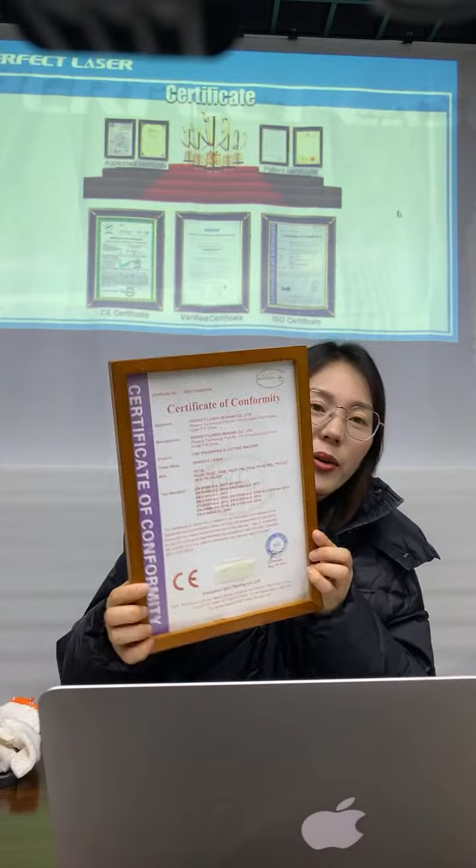And for all of our machines, we have got the ISO certificate, and also we have got many other certificates to prove that our machines really have a very good quality. So right now I would like to share some of our certificates for all of you. The first one is the CE certificate, you can have a look, this is the CE certificate.

And also the ROHS certificate. So the CE and ROHS certificate means that our machines comply with the European standard, so it's really very safe to buy from us. And also we have the golden supplier certificate. You can see this is the golden supplier certificate, and also this is verified by the SGS company.

As we know, SGS is a well-known international inspection institute. So through SGS verification, you really have no worry to buy from us.